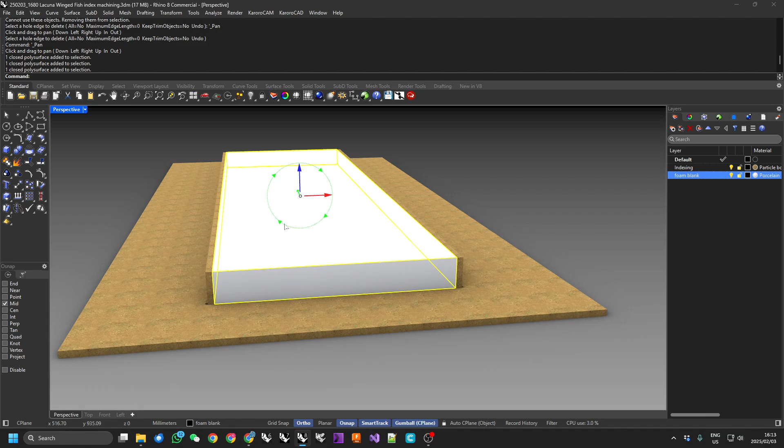Today we're looking at the second piece of tooling required for this process, and that is this indexing mold. So when we come to machine the board out of this block of XPS foam, we need to be able to flip that 180 degrees and actually know when we flip it over where we are in relation to all of the features that we machined into the first side of the board.

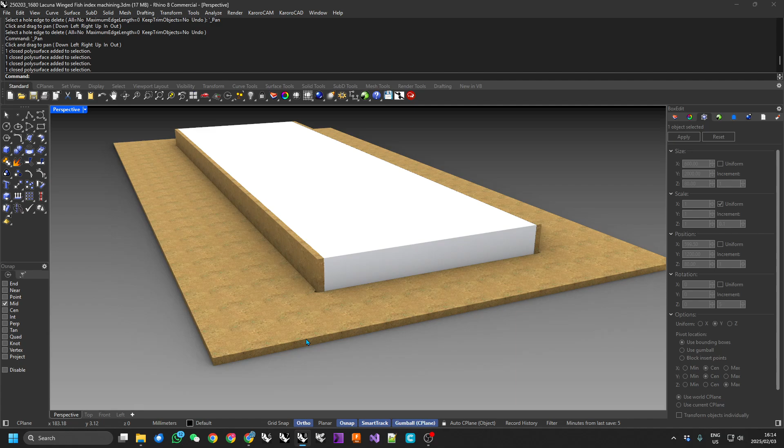So the actual blank, if we have a look here, is 600 millimeters wide, 2 meters long, and 80 millimeters high. And we're going to create this indexing mold out of 16 millimeter MDF, and we're just going to add these two sides to the 16mm MDF.

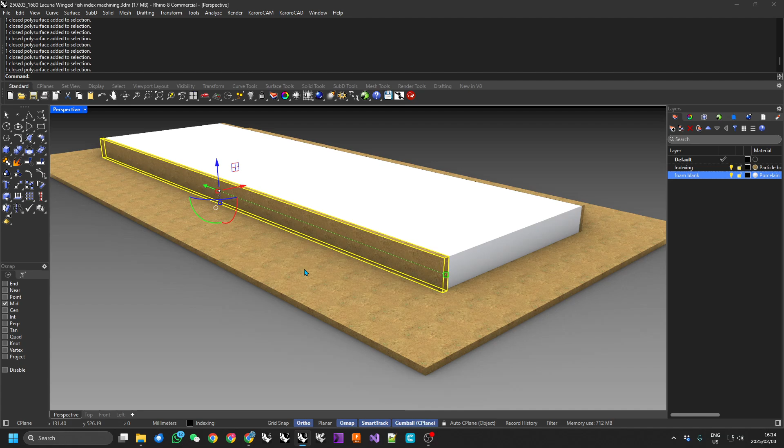So these I'm not going to CNC cut because I'm going to have access to quite a substantial woodworking workshop when we come to do this job, so these can just be cut on a table saw.

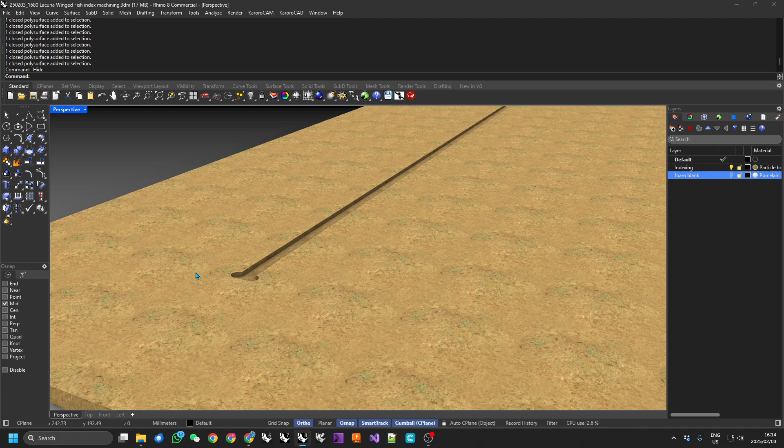But I do need to cut these recesses, so I know where these will sit into, so we know where we're going to be relative to the zero position of the actual machine.

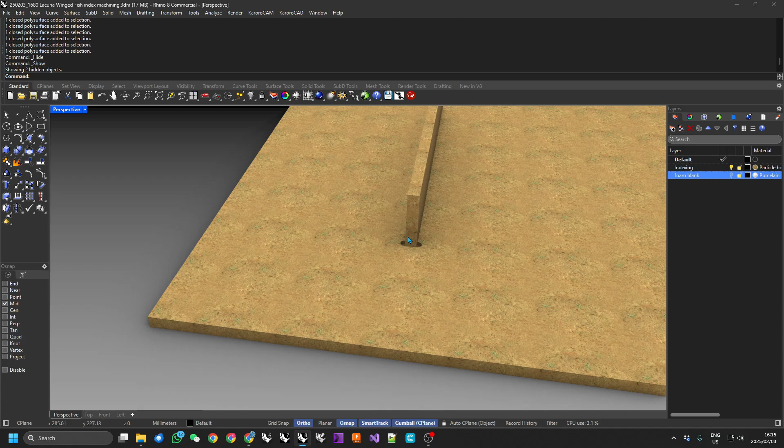What I've done to allow for clearance of the tool bit, but actually still have good indexing to these pieces, is I've allowed 0.5 millimeter of clearance each side of these slots and 0.5 millimeter on the ends, and I've just added these half rounds so that our tool bit can get in here and clear out those corners without us having to come back and chisel those out.

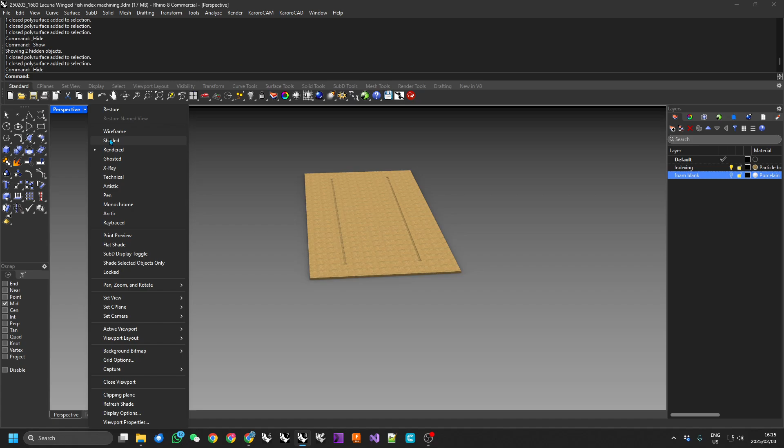So at this stage I can hide these two upright parts, and if we go to shaded view, this is the item that we need the CNC machine to make.

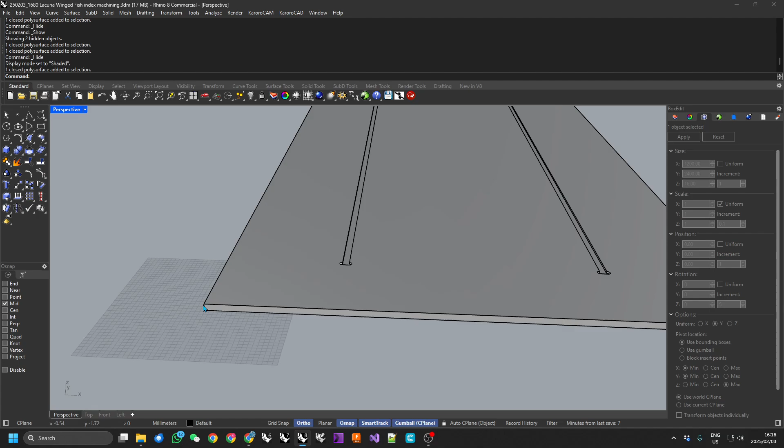Now I've set this up. If we look in here, X and Y minimum and Z max. So this point here is 0 in Rhino space, and we will machine this relative to the home position of the CNC machine.

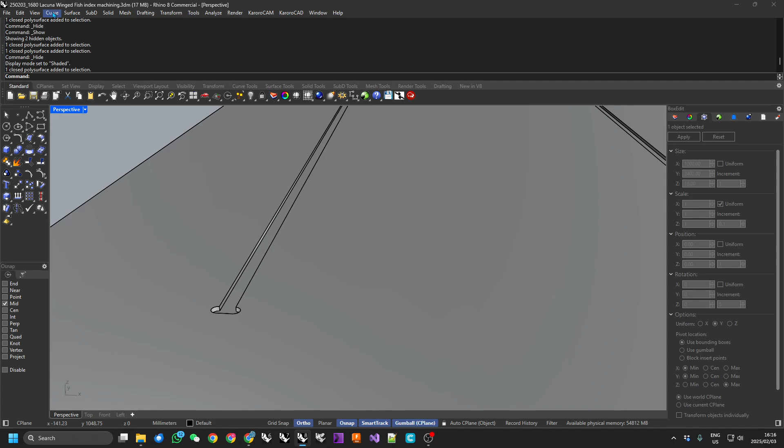So what I need to do to actually cut these recesses is I need some curves to follow, so we're going to go to curve, from object, duplicate face border, and select these two bottom faces.

And if we look here, these are actually 5 millimeters deep, so these uprights will cut 85 millimeters high to drop into here so that we're flush.

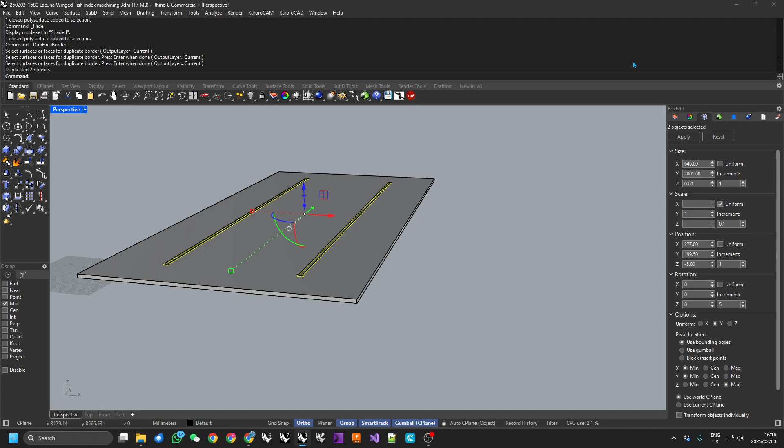Now I can, at this stage, simply turn off that indexing, and I'm going to start KaroroCAM, and it'll just take a minute or two to launch.

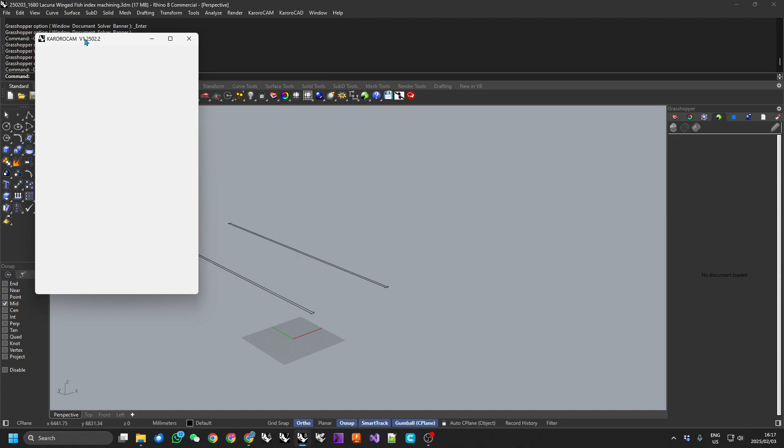Now, if these were bigger recesses, I might be tempted to do a pocketing operation, but I believe I can do these simply as a 2D profile cutting operation.

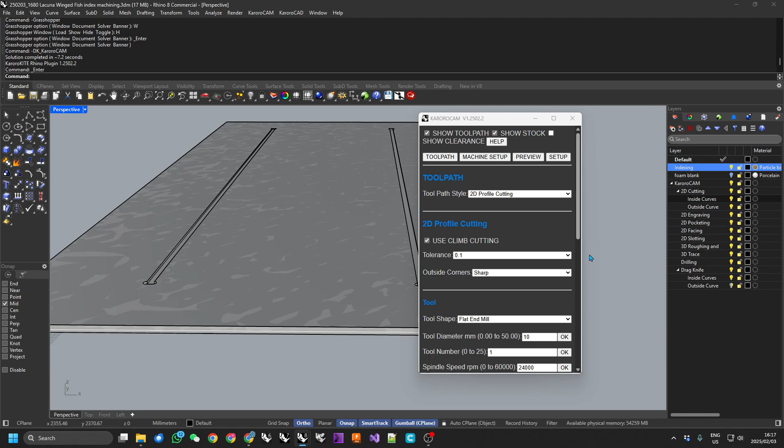So our original piece here, I've actually based this on a 1200 by 2400 piece of MDF. And if we go to our machine setup, that's actually the size that we've got set up in here, so no need to change that.

We can, on the machine, cut at 5,000 millimeters a minute. Our stock thickness is actually going to be 16 millimeters. Our Z position is stock top, and everything else on there is fine.

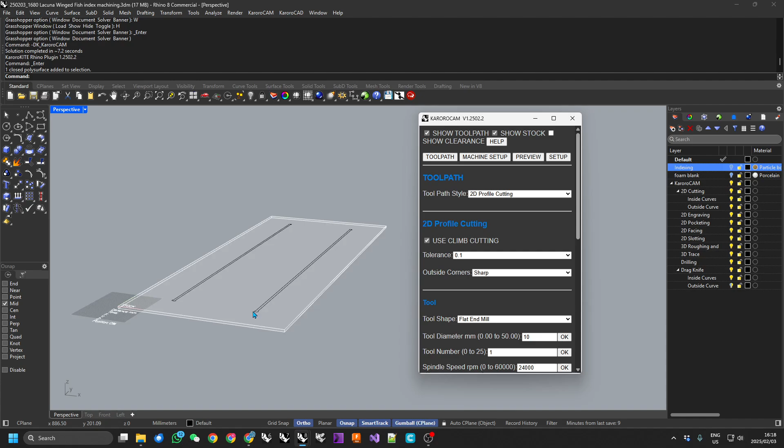Under Toolpath, we can use 0.1. Climb cutting is fine. A flat end mill, I'm going to use a 12.7. We don't have a tool changer, so we can leave that index tool number to 1. Spindle speed at 24,000, no stock to leave.

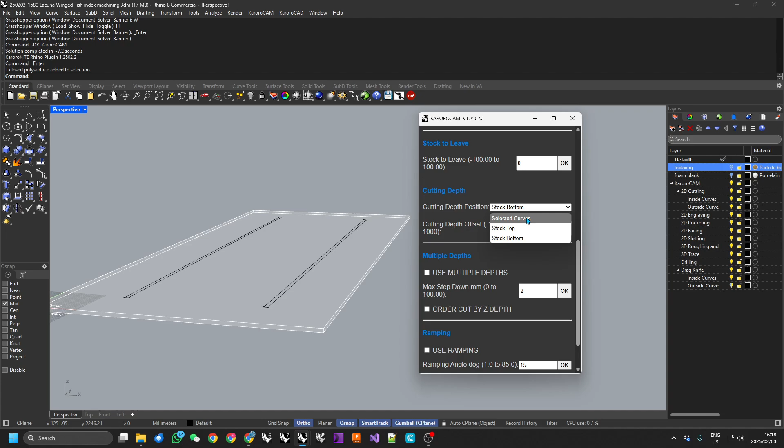The cutting depth position, we're actually going to use the selected curves because they were at the bottom of the depth that we want to cut, so that'll give us our 5mm.

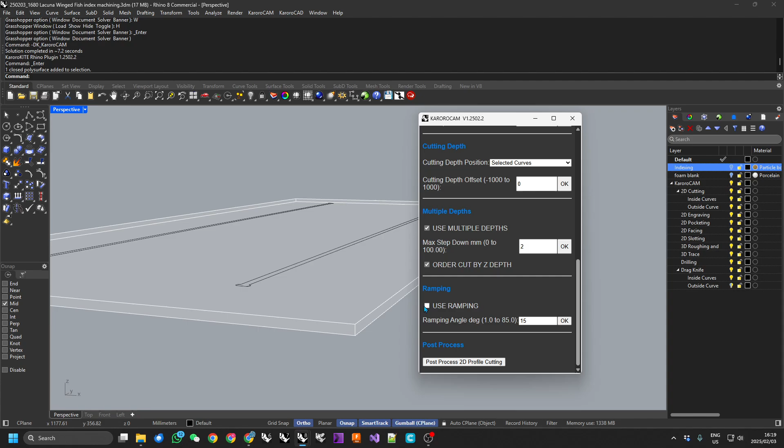We can use multiple depths, and let's go down in steps of 2mm, simply because I'm worried about the tool bit being sort of jammed in here if we are cutting too deep. So 2mm is fine. We can order cut by Z depth, and we can use some ramping on this.

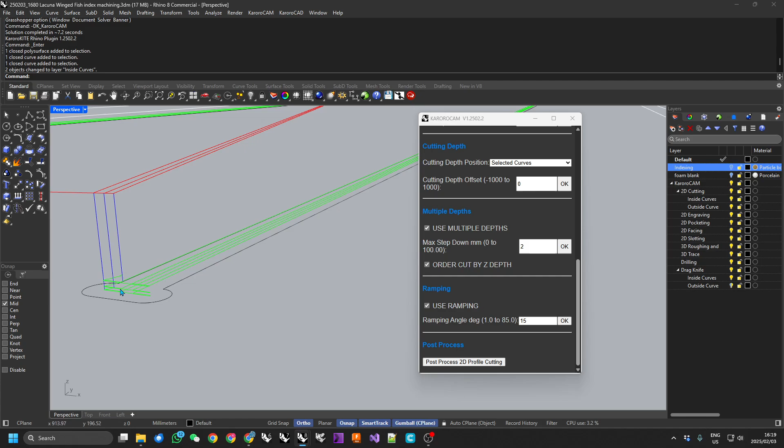Now, these cuts we're wanting to cut to the inside of these. So if we now grab these and move them to inside curves, you can have a look here. We've now created a toolpath that actually cuts to the inside of that line.

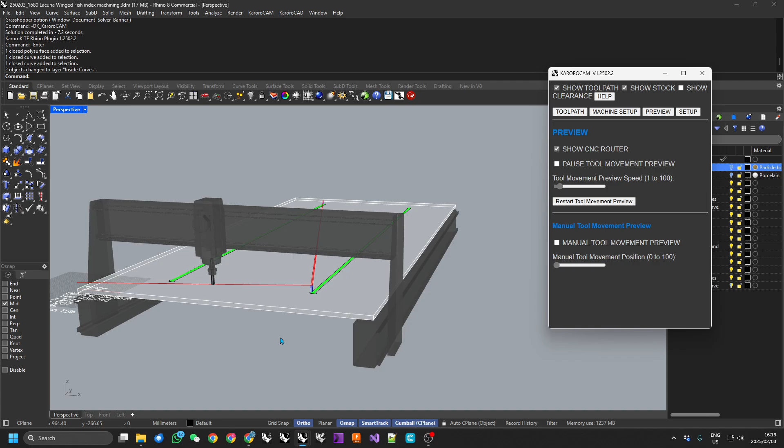And from here, we could go to preview. I'm going to pause that, slow it down and restart, speed it up a little bit, and we can watch the preview of this machining taking place.

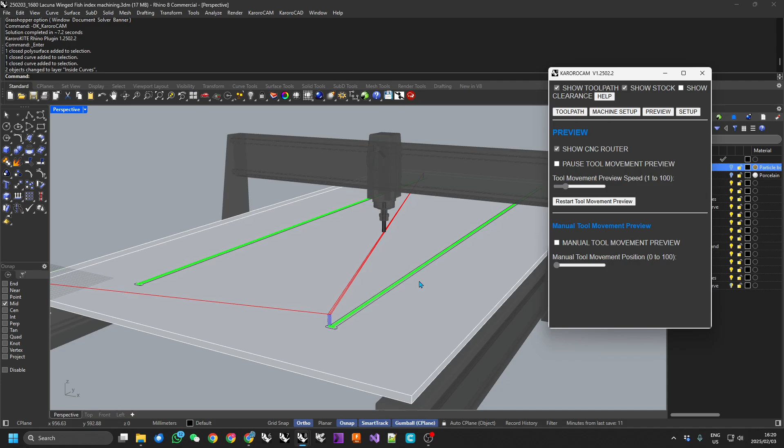So that's -2 to start, and we can speed that up a little bit. That's all looking really good. Let's see it go, slow this right down. No, let that just run.

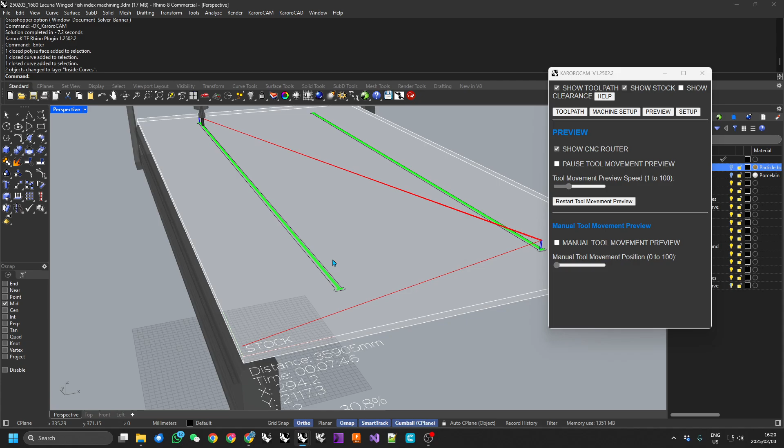But I think that is looking great, and we're only 7 minutes of machining to get this little job done. It'll mean that we have these 2 slots, and therefore the 2 vertical pieces that we're going to glue into there will be at a known position from the 0 of the machine, and that'll be vitally important for when we come to flip it over.

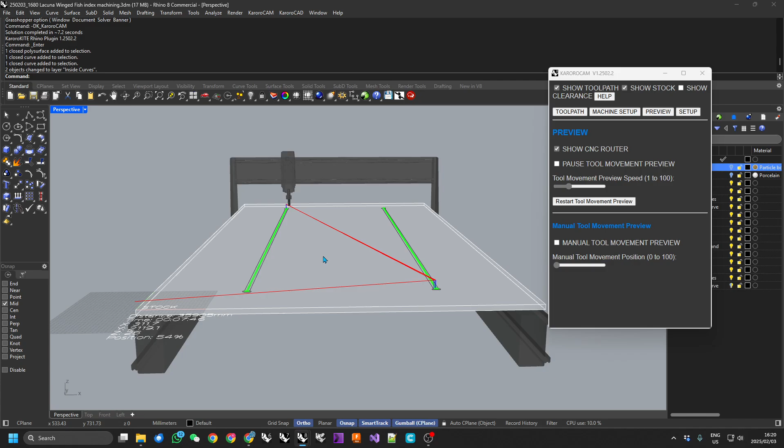So let's pause that, we'll go back to our toolpath. We're happy with that, so we can simply post-process.

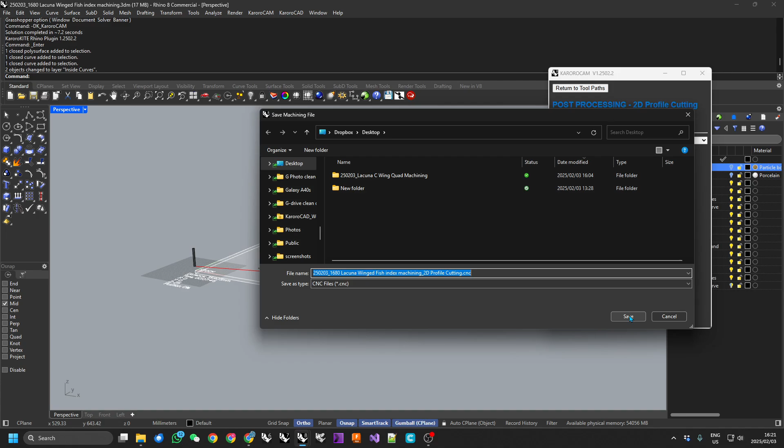We're on a Richauto machine, and we're going to save the G-code to our desktop, and it has picked up the name of this file with the 2D Profile Cutting.cnc on the end of it. We can save that, and if I open Notepad++ here...

And we can now open that file. We can see we have what appears to be quite valid G-code in that file.

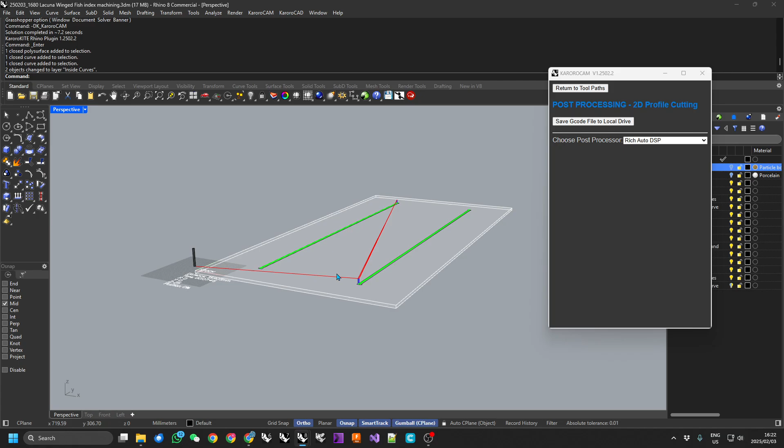Alright guys, there we have it. That's the second part in this series of how to go about shaping a kite surfboard using KaroroCAM, and it's the second piece of tooling that we've needed to machine, which is this indexing table on the bed of the CNC machine. If you have any questions about this process or how to use KaroroCAM for your own project, feel free to leave a comment below this video.